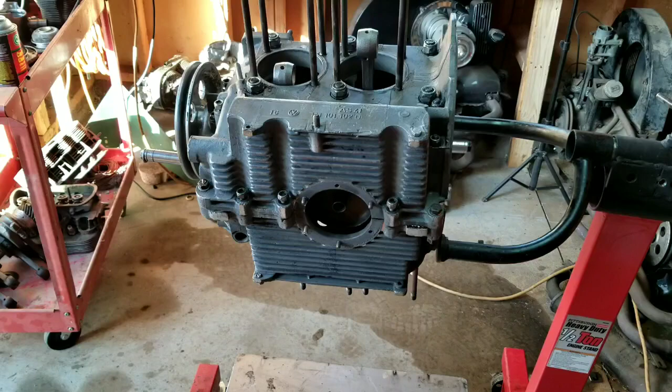All right, so we're going to talk a little bit about single relief and dual relief cases. I want to try and make this easier for you guys to understand. I've looked at a couple videos and stuff on this, and it can be pretty confusing, so I'm going to try and simplify it. My information may not be 100% correct, but mostly it will be, and it will help you understand this a little bit easier. You should do your own research to find out more about it.

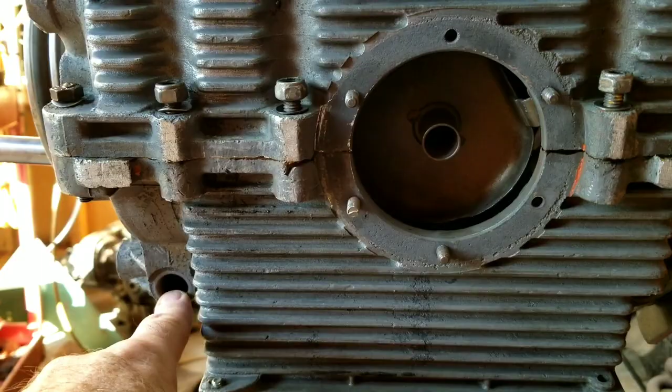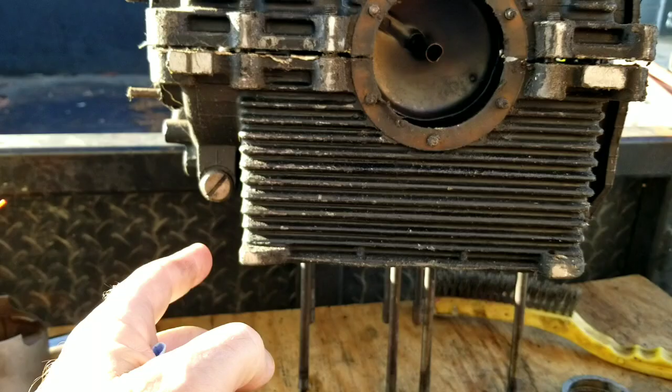This is a dual relief case. The case has a spring and piston that goes in here, and a spring and piston that goes in here. This is a 40 horse case, which is a single relief case. I also have a 1500 or 1600 single relief. So it's got only the one here, where if you look at yours, it'll have two of these underneath the engine if it's dual relief.

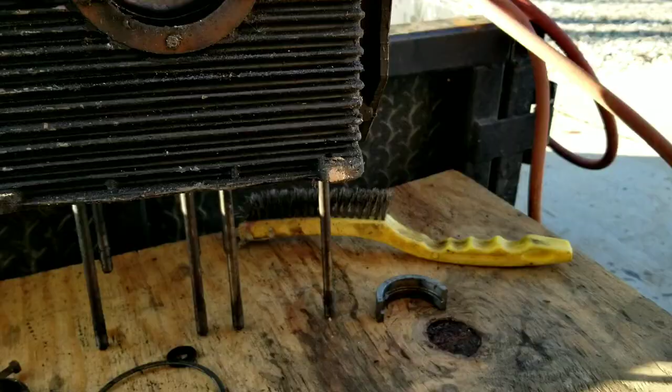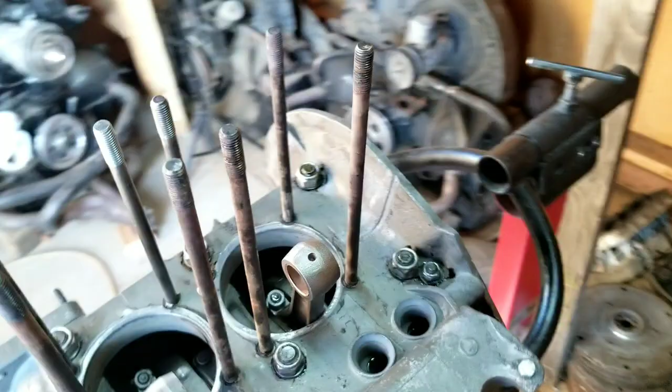So let's talk about why they changed to a dual relief instead of a single relief. They said it was because of emissions. A lot of places said it was because of emissions. I don't really think so. I don't find Volkswagen to be - other people think Volkswagen's a super honest company, but of course they made the TDI scandal, so I don't find them to be always honest. You should always back research everything they say, because you never know if they're saying something just to protect themselves. But I think really what they were running into is trying to make the engine run a little cooler, and that's why they went to the doghouse cooler. They wouldn't admit maybe that the other coolers weren't working as well, because that lends them up to lawsuits, right? So they said it was for emissions.

Don't agree, but anyway, let's look at this - what the difference is. There was an oiling issue, and I have a chart over here.

So if you see here on this side of the case, there's the oil pressure relief valve here. It goes through this system, through this little - you can see right here, that's your oiling, goes through there. And then that pressurizes and puts oil into different parts of the engine, which I can explain to you easier on the chart. I just want to show you on the engine how it works like this.

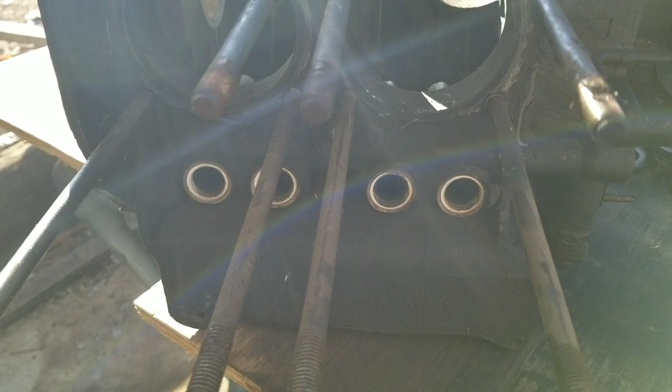On a single relief case, they had one relief valve here. As far as I know, the relief valve works like this: when you first start your engine, it allows oil to go through the engine first, and as it gains pressure, the pressure relief valve goes down and allows oil to go to the cooler. That's the way I understand it - may or may not be right on that one, but the rest of it I'm pretty much right on the money.

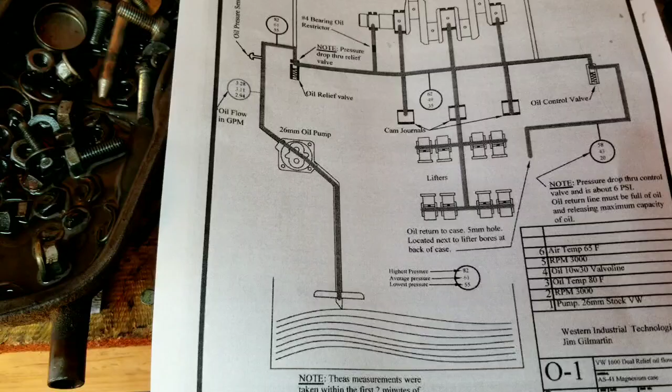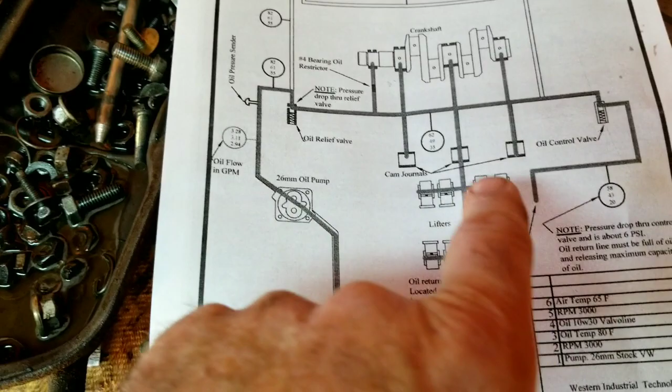Okay, so the oil pressure goes through the pump, goes up through that thing - that's the relief valve. That's where it is on the actual engine, where I showed you, and then it goes through this rail here, and then into each part of the engine. I'm going to show you what the Hoover mod is as well, and the concept of that - it kind of makes sense. But it goes up through here, then down through the cam bearings, and then down to the top end oiling.

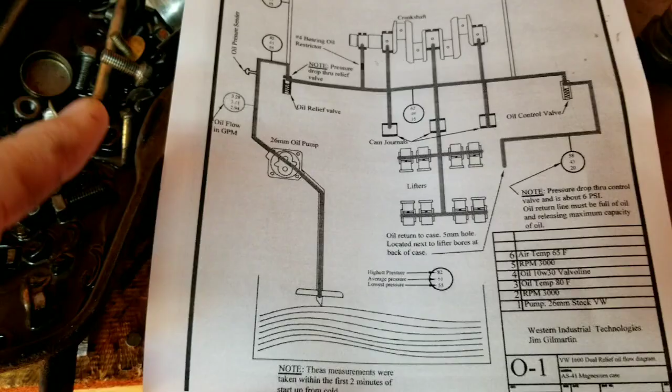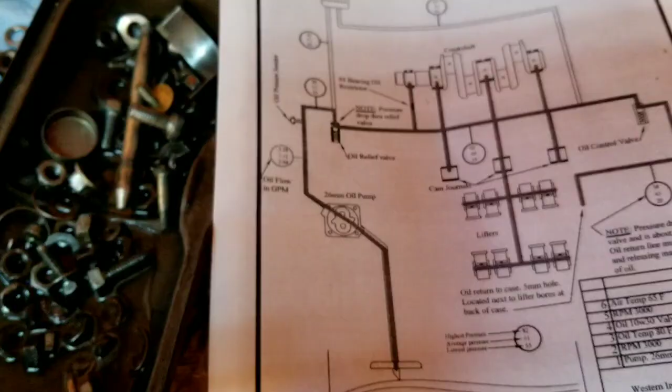And through the lifters, of course, to the valve push rods and to the top end. So what the single relief does is it has a smaller rail, the oil rail here, than on the dual relief. Now on the dual relief case, it's smaller on the single relief.

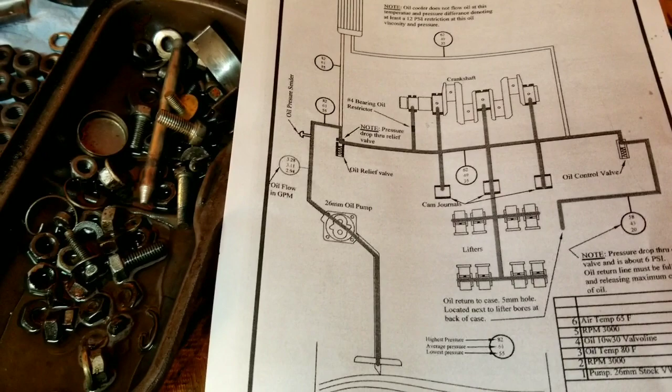The problem with that is the pressurization can start to diminish more as you go along further. The easiest way to understand that is, let's say you're talking about sprinklers in your yard. Let's say you have a 1 acre yard and a 3/4 inch main pipe to your house. To get water pressure to the back of your house, you have to run a larger pipe for the pressure to be the same as it is in the front.

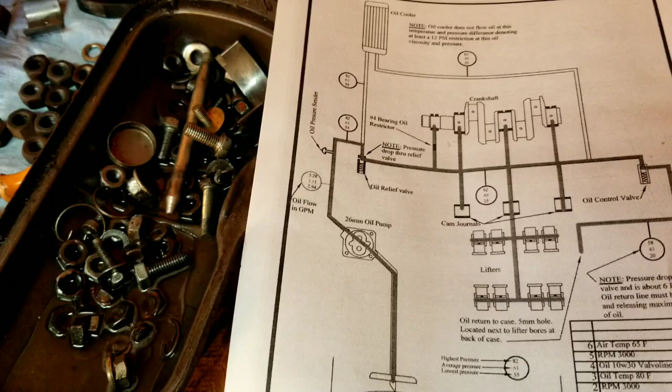So your sprinklers will work back there, same concept in oil. If they have a larger main tube going through here, it evens out the pressure for all the areas it goes through because there's more supply. That's just an engineering way that they actually do this.

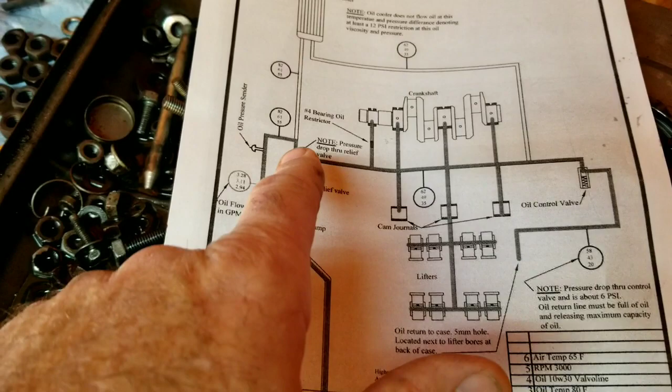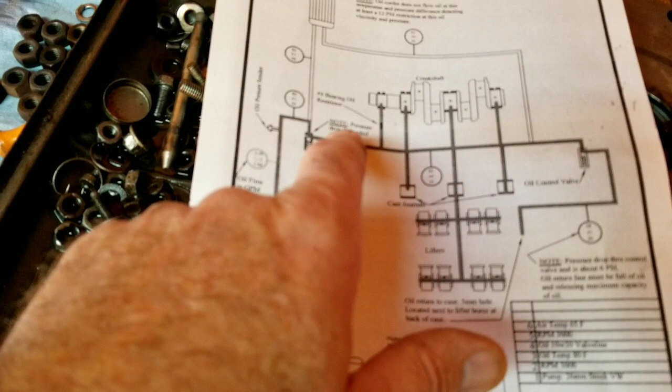So when they did that, they went with a larger oil pump. The earlier ones had a smaller oil pump. People go, well, what if I just put a larger oil pump on my other one, on my single relief? What's going to happen is it's still not going to get enough, because this is a smaller pipe in here. So it's like running a 1/2 inch main to the back of your property.

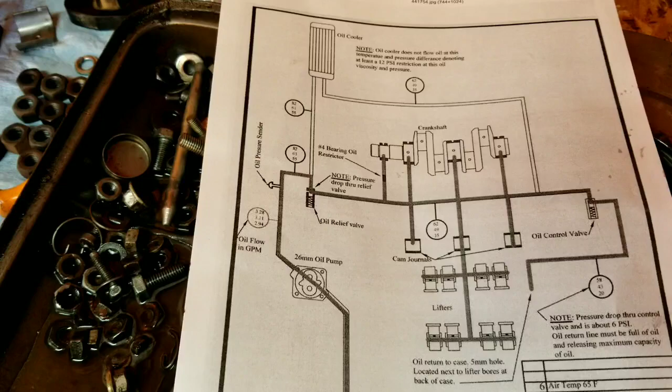You're only going to get so much pressure. You can sit there and ramp it up all you want, but it's going to ramp up so high here that it could possibly blow the oil cooler up. That's what the guys are saying about the oil cooler problems. And that all depends on your RPMs. So if you're not running a lot of RPMs, maybe it's going to be okay. There's just a lot of engineering things in that.

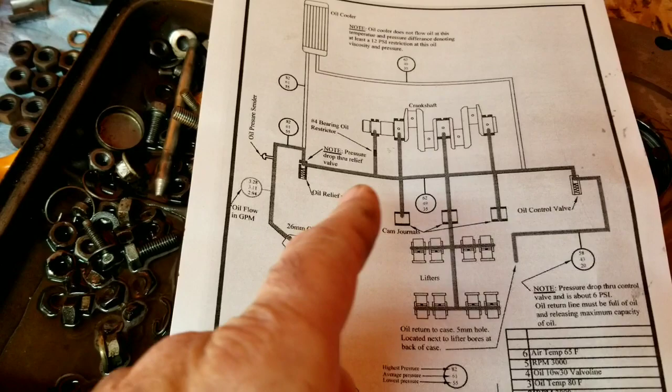That's why it's better to use a dual relief case. So there's guys that go, yeah, I've got a 2007 or whatever, 2276, and I've got a single relief case. It's really, to me, just not a good idea, because what you run into is RPM limits.

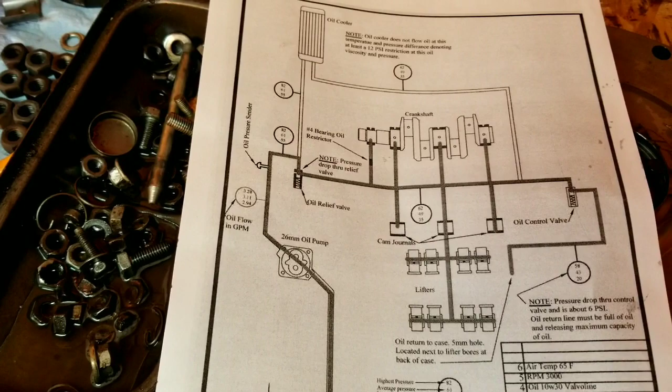So for every 1,000 RPMs, you need 10 pounds of oil pressure. So when you're running a bigger engine, it's going to be prone to want to rev higher. And when you start revving above the oil pressure supply limit, it's going to be a problem for parts of your engine, probably somewhere in the center main or the back here, where you're going to have oil deficiency, and it's going to cause problems.

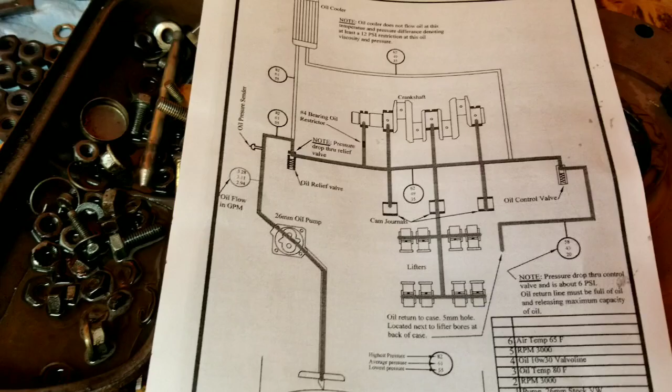Now, when they went to the dual relief, let's talk about that. They made a larger passage through here. The supply is a lot larger. So when the oil came off of each one of these, the sprinklers, they had better, more even pressure.

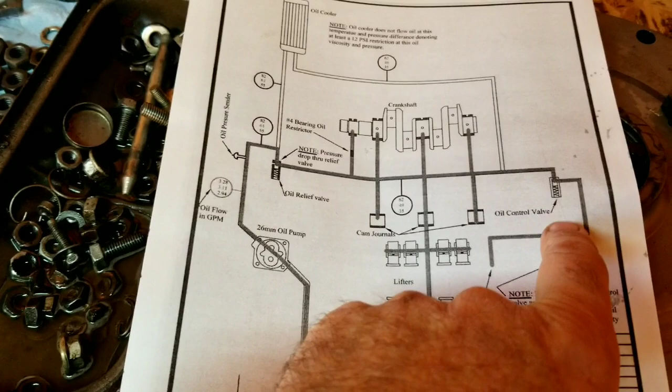Now, to compensate for that, what they had to do is put a second oil relief valve in the back, because it would ramp up too much pressure, and possibly they were worried about the oil cooler again blowing up. So again, that's the issue that a lot of people are worried about with the single relief case, is the oil pressure being ramped up too high to blow up the oil cooler.

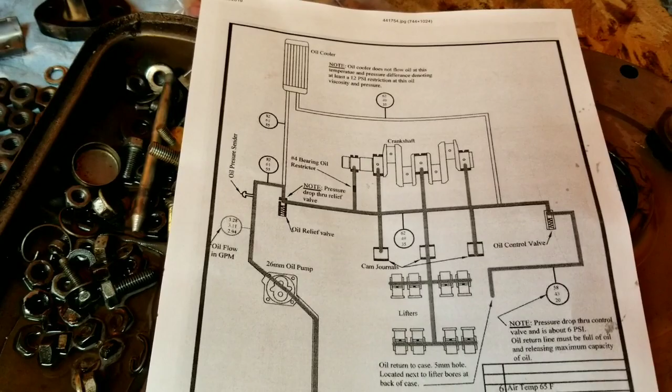But they should be more worried about the potential of oil loss to areas of the engine, because there's not enough supply through the middle of the engine, where I just showed you the side of the engine here. Let's look at that again.

I've often wondered about drilling that sucker out, but I don't know, then you'd have to create a relief valve. That'd be kind of difficult to do, but it is possible. I don't know how much meat there is in there, but that'd be interesting if somebody came up with something like that.

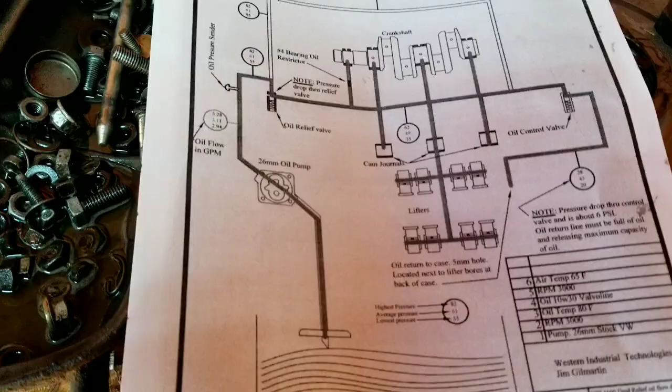So they put in the second relief valve, what they call the oil control valve, and what that does is it keeps the pressure even. So I've seen guys that say this, let's talk about some of the other oil pressure things that I've seen.

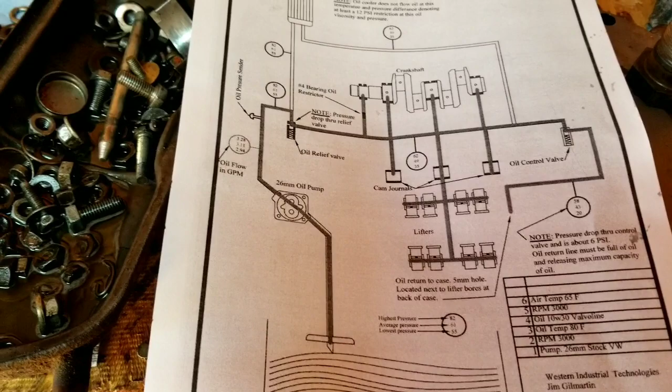I said, Mike, you don't need the high pressure springs on your bigger engine. And I'm going to disagree 100%. The reason you have the higher pressure springs is because, remember, every 1,000 RPMs you need 10 pounds of oil pressure to make that up.

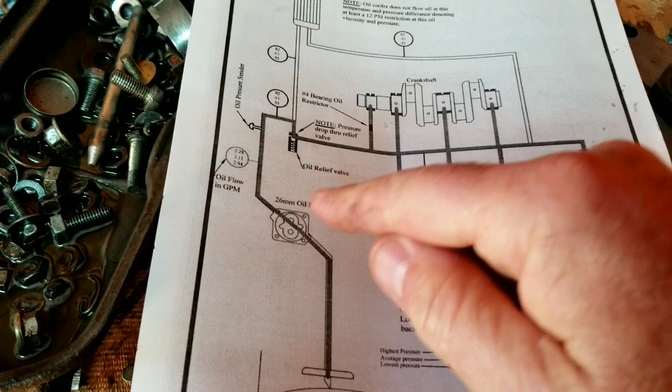And there's pressure loss between here. This oil pump, from what I understand, even a 26 millimeter, is capable of putting out 300 pounds of oil pressure right here.

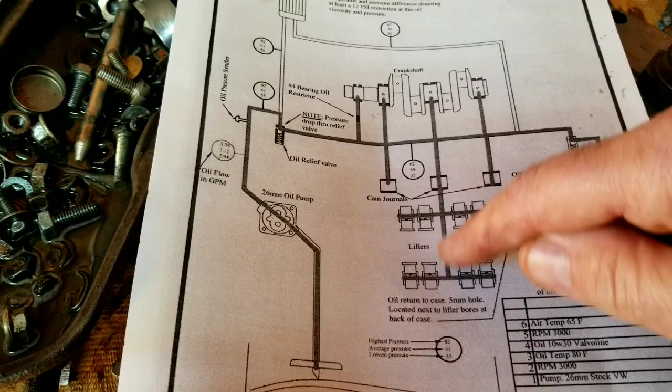Now, as it goes up through the system, you have oil pressure loss. So over here at this rear front main and through the center main is where you have all this teeing off, right? You're going to have a lot more potential.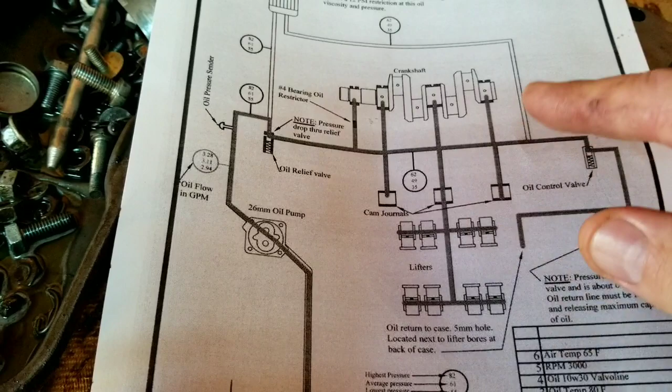Now you don't have a way to actually check oil pressure right here, right? So if this is deficient right here or here, more than likely it's because it's teeing off and doing all this stuff. That's why some of the guys like the Hoover mod, which actually drills through and creates a passage between here and here and here and here.

You can look up Hoover mod. There's a guy who shows it on YouTube, does a good job doing that. And I think he's commented on the channel a couple times.

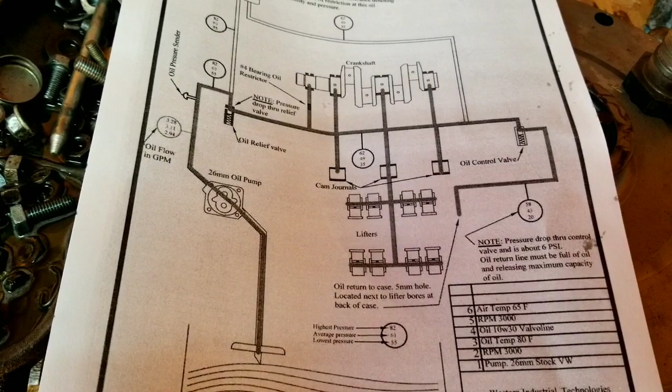But anyway, you could do the Hoover mod here, and it will actually help even out the oil pressure loss from going and oiling the lifters.

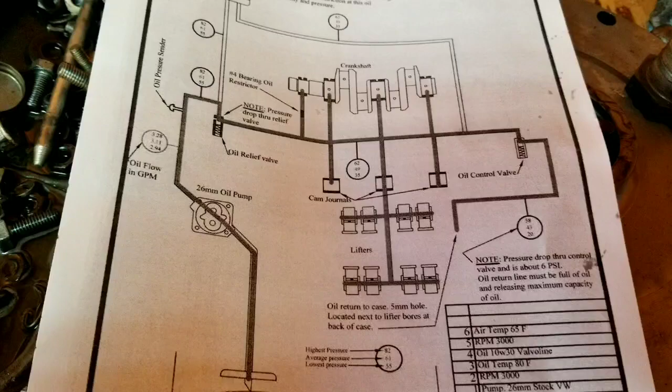You're trying to out-engineer Volkswagen, you know, for a good reason, because you're trying to get more power out of the engine than they were ever expecting it to do. It's engineered correctly, but you're trying to do a little bit more to make it work better by basically taking these passages here and making them connect to the lifters, which is a smart idea.

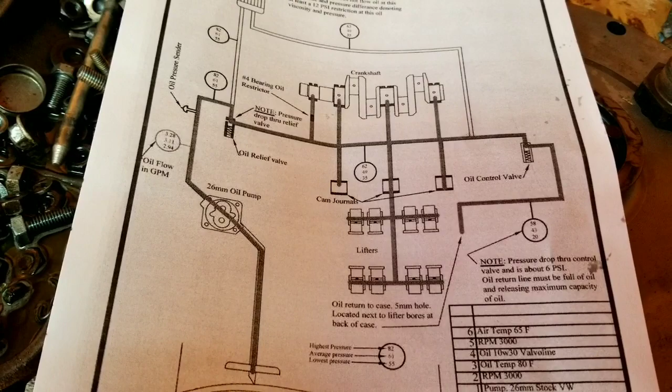What is it? It's not always necessary. It depends on your engine, depends on how much horsepower you're running, depends on all that stuff. RPMs, remember, are limited by oil pressure.

So what you got here is the oil pressure relief valve, because there's so much more supply here and so much more average pressure buildup. They have to relieve it with a second valve over here, and it dumps off back into the case.

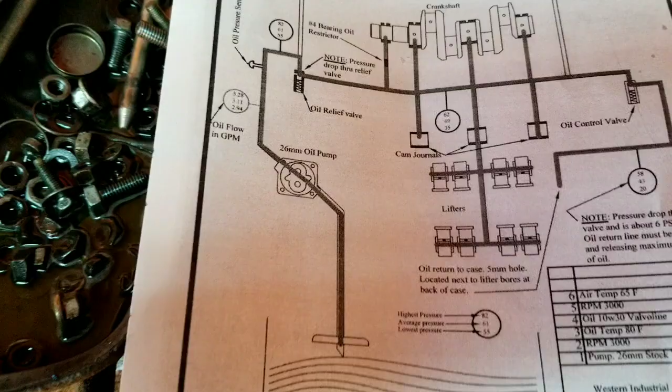So what I'm going to do is talk to you about the full flow thing in the same video, so you can understand how that works and the reason why some of the guys started opening the cases up years ago. It became more of a common thing over the years.

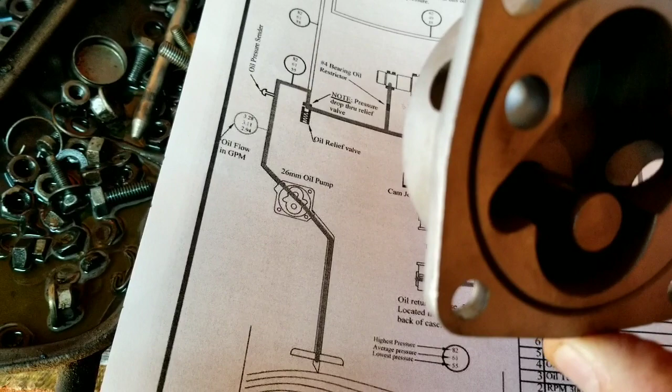Some guy commented that I had my years off, because back in the early days, the 80s, early 90s, there weren't a lot of guys doing this, because they were not going for large engines. Large engines were really, really expensive to do. Building up that many RPMs was really expensive to do.

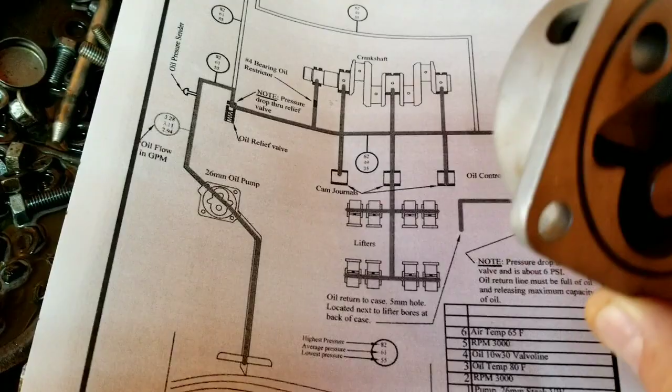And guys, it was very cheap to build an engine over and over versus going ahead and trying to make one last. Okay, but today that's a totally different story.

So a lot of guys would use this type of an oil pump with two lines on it. The pressure side comes out, goes through your filter system and all that, and it comes back in through this very, very small hole. It makes that real sharp turn and comes out through this one, then goes up through the rest of the engine.

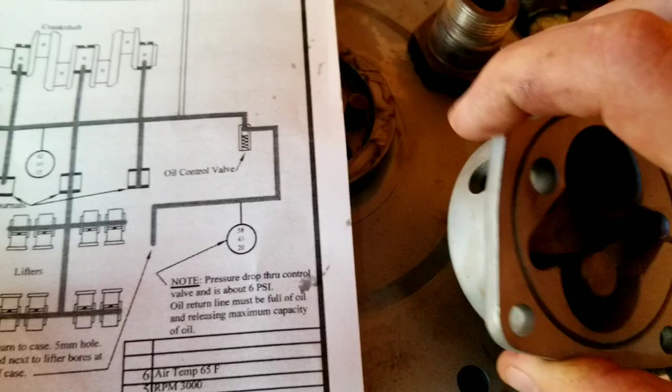Remember I was talking about sprinklers, right? That is a really small hole, right? So it goes through that whole system, and then it comes back and goes through this really small hole, very restricted, okay? And it has to make that sharp turn and go up.

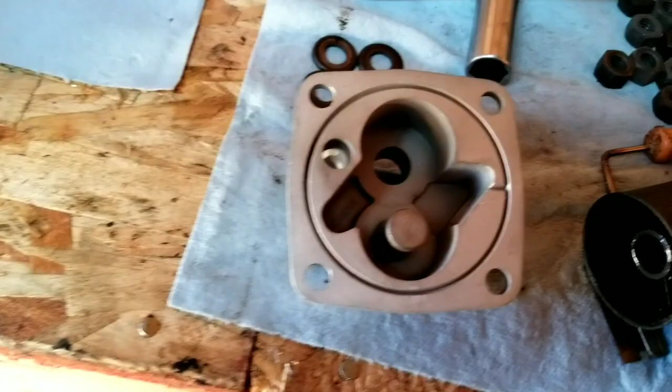There's a pressure loss from doing that. So what the guys figured is to actually open the case right in here and have a return with a very large pipe going into the actual oil galley right here.

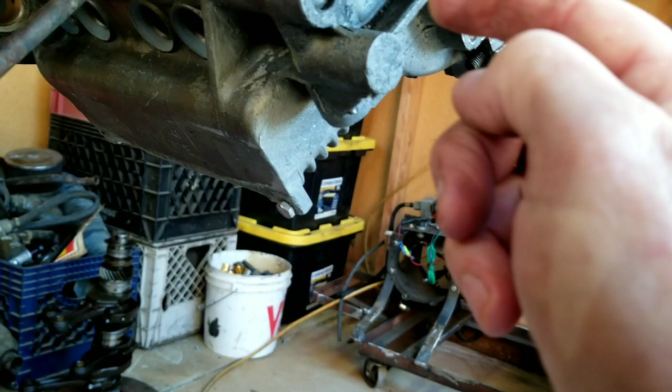I believe it's right here. Okay, so I have a very large return going directly into here, blocking off this area right here.

What that does is it keeps your pressure up higher, so you have a more efficient and better supply of average pressure in your fuel—I'm going to call it your oil rail, I don't know what it's really called. It keeps that at a higher, more average pressure, because there's not as much pressure loss going around this corner and back through that tiny hole.

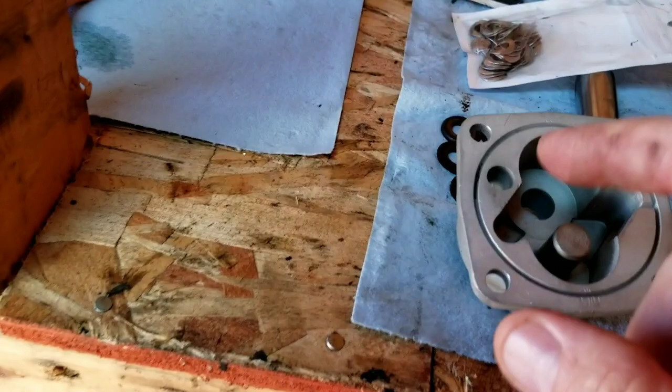So that became more common. These were kind of the first way to do it, and then it became the opening of the case thing later on. Guys were doing it a long time ago, but it was less common because fewer guys were building big engines. That's why I said in the earlier videos that it was less common.

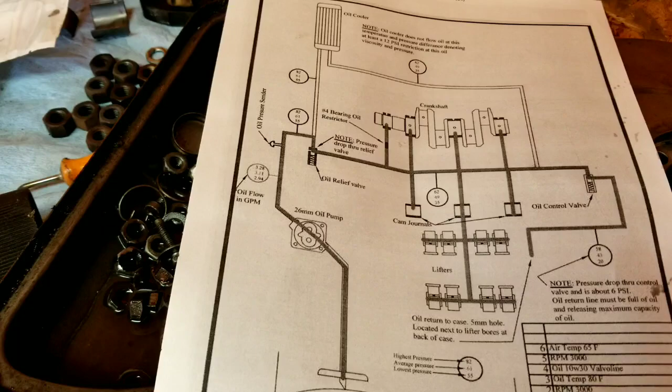It's more common now because you got to think about it—building a 2332 compared to back when I was doing VWs in the 80s, it's almost the same price. It was like $8,000 to $9,000 back then, now it's about $8,000 or $9,000. When I was 18, telling me $9,000 was like telling me $1 million—there's no chance I was ever going to come up with that kind of money. So of course the quality of parts then was better.

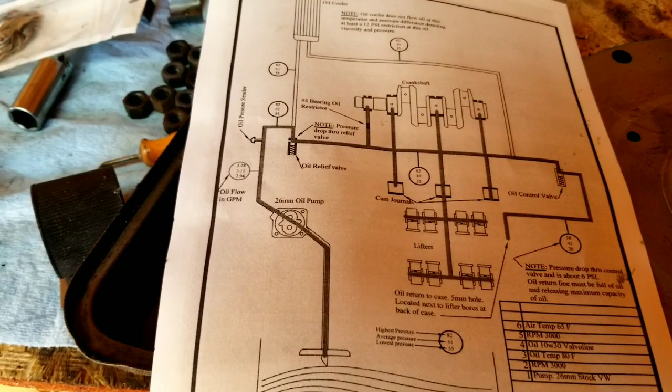The crankshafts, the one you'd have to buy now to keep up with the one you could get back then, was $3,000. The one you can get now for $3,000 is really expensive, and it works, really good steel. But we have the Chinese ones too, which aren't terribly bad, and they do work.

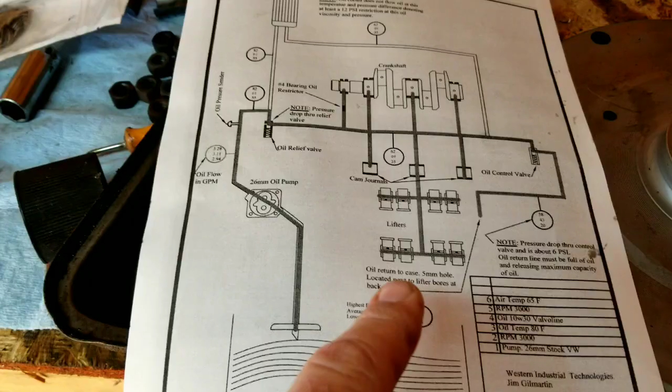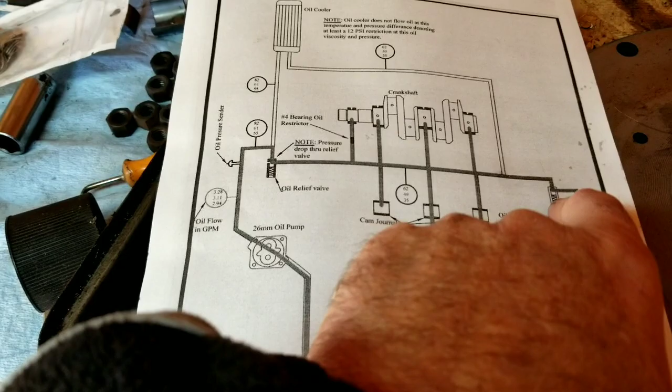Anyway, that's kind of how the oil system works. The single relief is lacking this second spring, because there's a smaller oil hole to go through here, so the supply isn't high enough for it to actually ramp up enough at the back end to go through. Plus, they had a smaller oil pump.

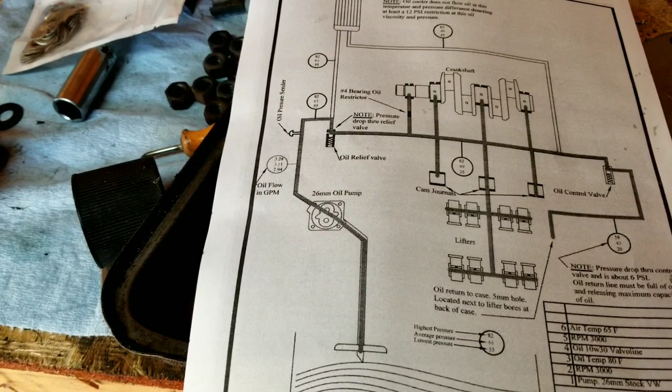So here's some of the things people have tried on the single relief, is to crank up the oil pressure. I had this on the old one I had that was single relief—I think I knew it was, but I didn't care. The second time I did it, the case was already opened up, and I knew it was single relief, but I'd forgotten about it and didn't care. I remember now, we had the conversation, I kind of remember talking about it, but I'd completely forgotten.

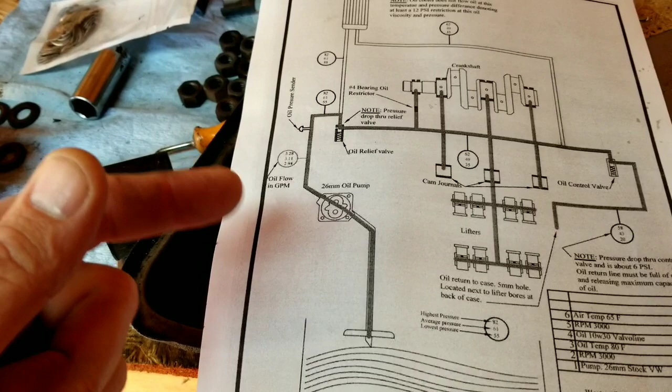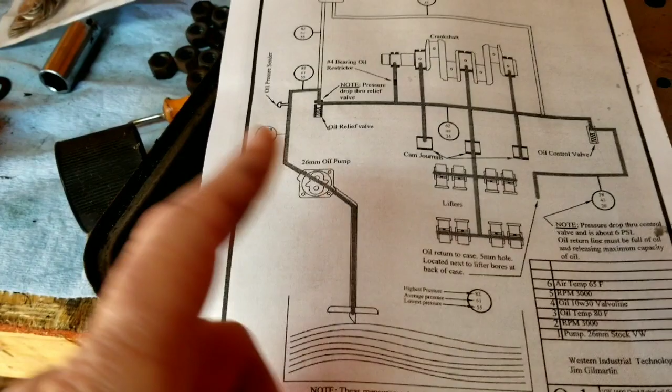It's about how many RPMs are you going to run. I was up in the 6s, and that engine should have probably only been in the 5s, and it would have been fine. That's why there's some wear on some parts—not the pistons, but the cam, I saw a little bit of wear, just a little, wasn't much. Still a runnable cam, I'm just going to run it in that used parts engine, which you guys will see later if you want to come back for that.

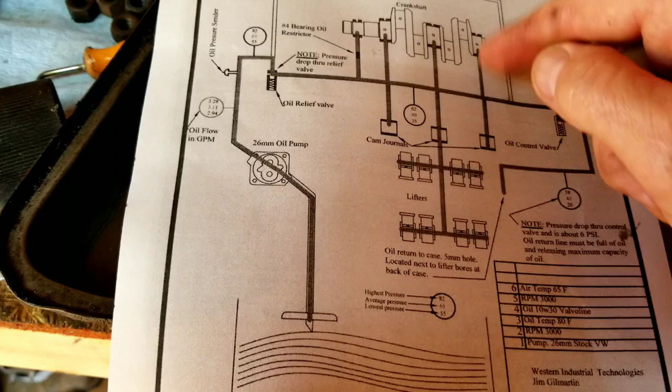But anyway, what happens is on the single relief case, guys will try to say, well, I can get as much oil pressure out of that. You can't, because your supply here is less—this sprinkler over here is going to have a lot less water going through it, if you know what I mean. If you relate that to sprinklers, it's a lot easier to understand. So this supply, they'll crank this up and put a bigger oil pump in here.

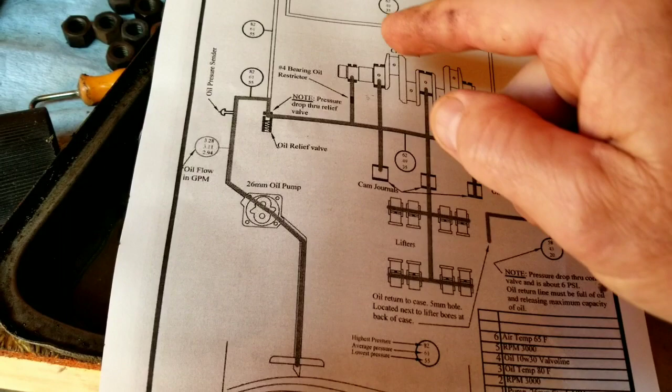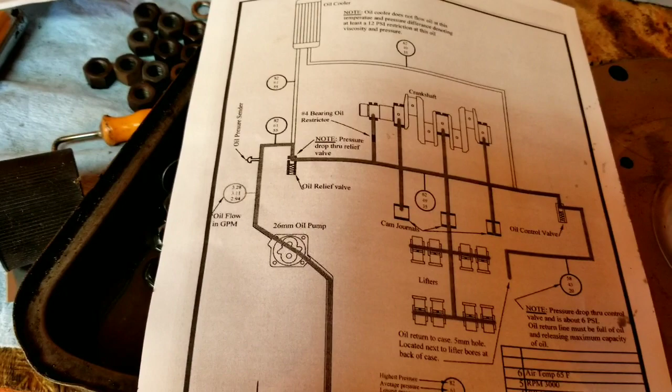It'll open this thing up a little sooner in the morning, and it'll go right through the cooler, and potentially in cool weather you might be over-pressurizing your oil cooler. That's when you could have issues with that thing blowing up in cold weather, when the oils are really thick. With the multi-weights they have now, I don't know if the guys have factored that in. Maybe running a 10-40, you're thinner weight when it's cooler, and when it's warmed up, you're kind of trying to play with things that shouldn't maybe be played with.

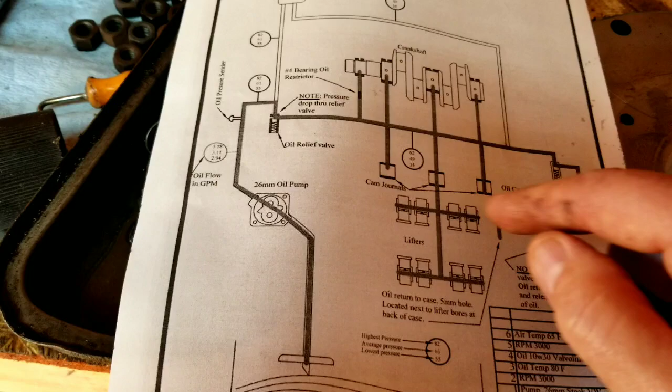So your oil loss here is going to be less. Again, the Hoover mod is like connecting these two to this, and that actually would help out with evening out the pressure on probably either engine. But again, when the supply here is less, it becomes less.

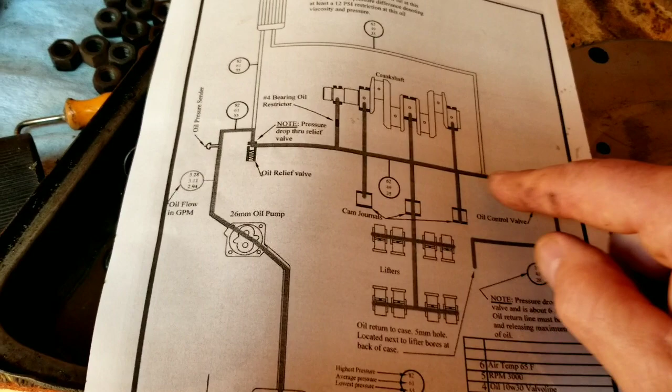And if you open up this supply here, let's say you were to drill that and open it up—I don't know if you can or not, but let's say you did and got it successfully done—you'd still have to add the second relief in, because you would ramp up way too much pressure here, and the same problem would happen. It would build up too much pressure in the oil cooler and potentially blow that up.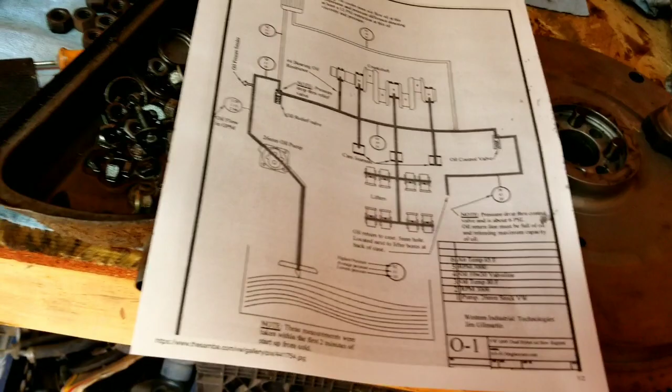This is what I've understood from reading stuff and trying to remember some of these things. A lot of the stuff I've read is just kind of confusing, and I'm hoping I don't confuse you even more. I hope the way I'm explaining it makes it a little bit easier for you to understand. It's kind of complicated, hard for me to explain, but I'm trying to simplify it and make it as easy as possible for you guys to understand.

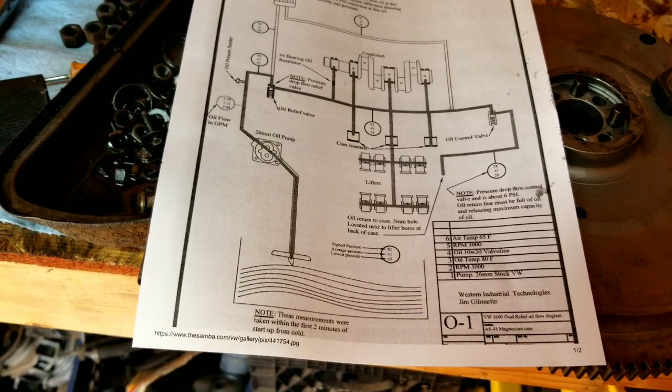So anyway, I hope that makes you guys understand the difference between a single relief and dual relief case. That's why for a lot of engines, I don't like to say throw away all your single reliefs—they're actually good for 1600. And if you run a larger oil pump on them, and you're in an area where you're not worried about the oil cooler blowing up because it's very, very cold—I think it's really cold times, like in the winter, when you're going to possibly have an issue with that thing blowing up.

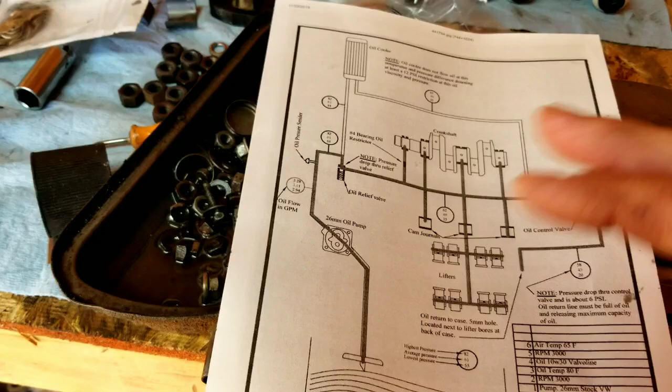Maybe using an external one instead of this, running like the external EMPI with the fan. That thing's pretty beefy, could handle the pressures maybe more than the stock one, and just winding off the fan and not going with the doghouse, because the engine was not designed for a doghouse. So maybe that would help.

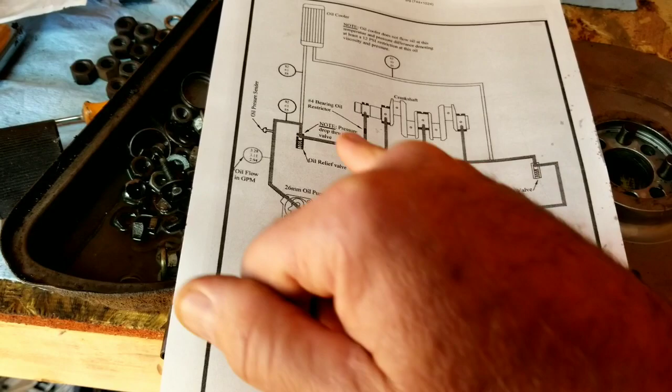It's your baby, so you figure out how you want to do it and make it work. But again, you're taking some risk, because the single relief just doesn't have enough supply here.

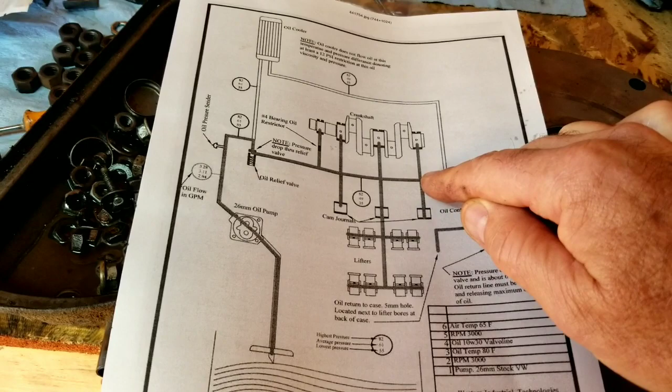You're going to lose oil pressure as the engine wears in these areas, probably here, center main, back here—probably not up here, because the longer it has to go, there's resistance in that. As oil goes through here, there's more and more resistance. If you have a larger tube, there's less resistance. It goes back to here, and there's less resistance, so there's a better supply for these areas, even though these holes here are the same size. It's this rail that is larger.

So anyway, I'll talk to you guys in the next video. Hope it helps you understand your oil system. I know it's kind of long, but it's a complicated subject.